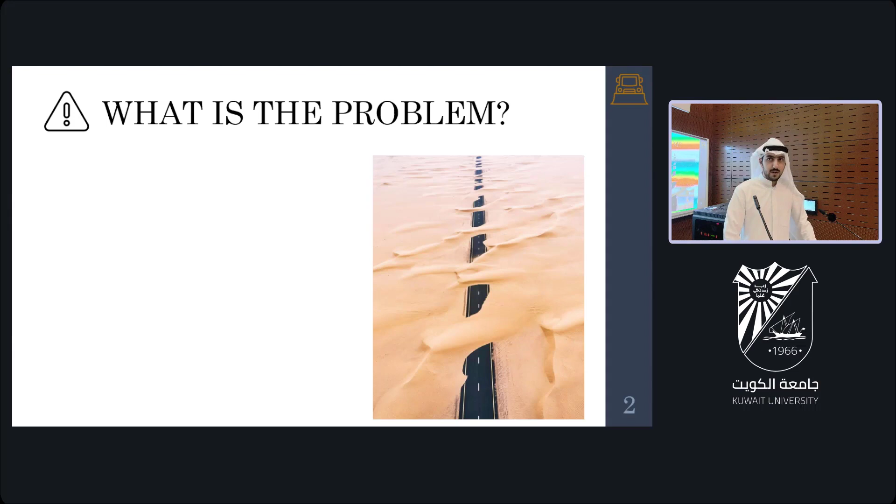As you know, Kuwait is located in a hard geographic location that causes a lot of troubles to us, and one of these troubles is the desert. The desert is a source of very fine sands that can be moved by the winds. When the sands move by the winds, they accumulate on roads, causing many problems like car accidents, logistic obstruction, and impeding the movement of residents in new cities.

Logistic obstructions mean we have international trucks that move goods from neighboring countries. Also, Kuwait cities are becoming larger. We have new cities like Sabah Al Ahmed City and Al Mutla' City, and all people living in these cities are suffering from sand accumulation on roads.

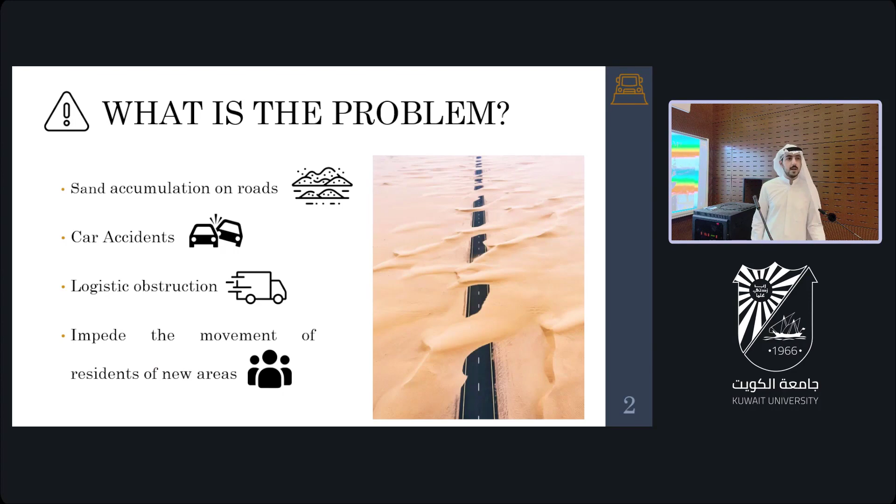The second road is Safq Road. This road is very important because it serves Sabah Al Ahmed City and its residents. The last road is the As-Sabbiya motorway, which will, inshallah, serve the future Mina Mubarak Al-Kabir port. This road problem needs to be solved.

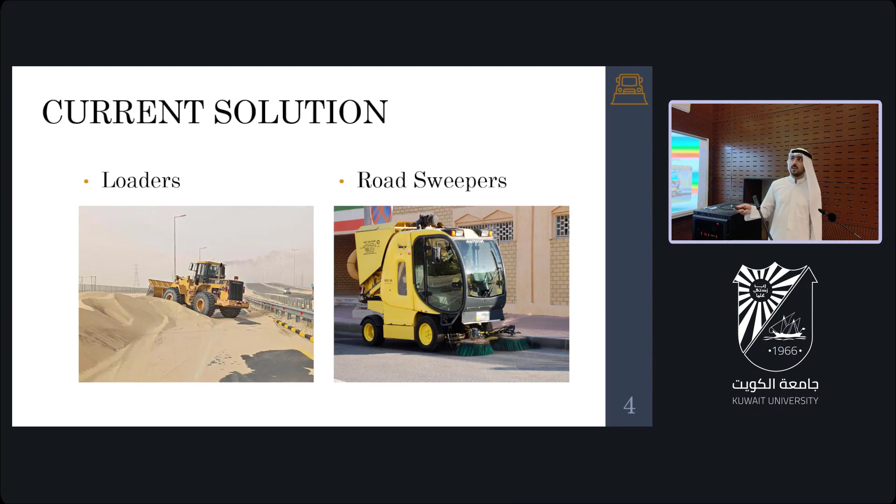The current solution is that the government has contractors that use loaders and road sweepers to remove the sands from the road.

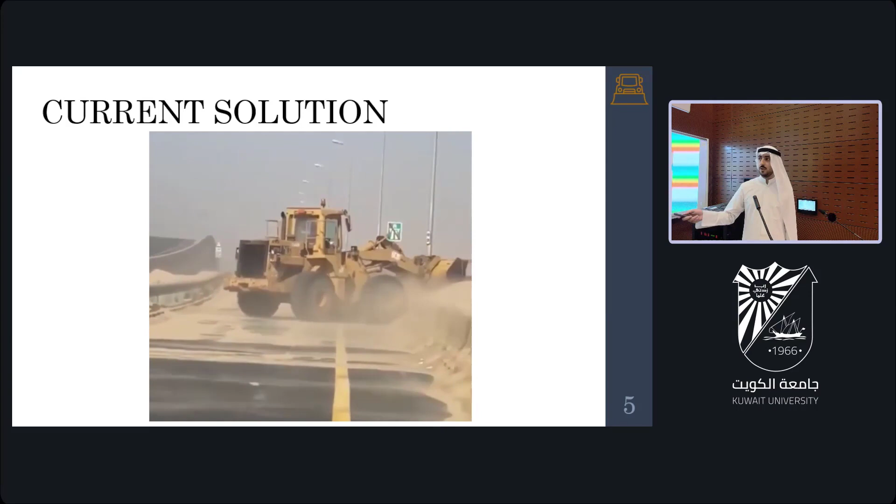As you can see in this video, at the very beginning, the loaders come and remove the mountains of sand and put it on the side of the road. Then the road sweepers come and remove the remaining 1 or 2 centimeters of sand, because the loaders are not capable of touching the asphalt, otherwise it will break it.

So there are many disadvantages of the current solution. It will double the effort - you need both loaders and road sweepers to do one operation. Also, you will double the need for laborers.

The second thing is that it is money and time consuming. You need more than 2 days to complete one road, and it also costs hundreds of thousands of dinars.

The last thing is that, as you know, Kuwait is full of unutilized potentials, and we can utilize these potentials more. We have Ministry of Public Works engineers - we consider them as manpower. Also, the Ministry of Public Works has many Pajero vehicles, thousands of them, so we can take benefit of them.

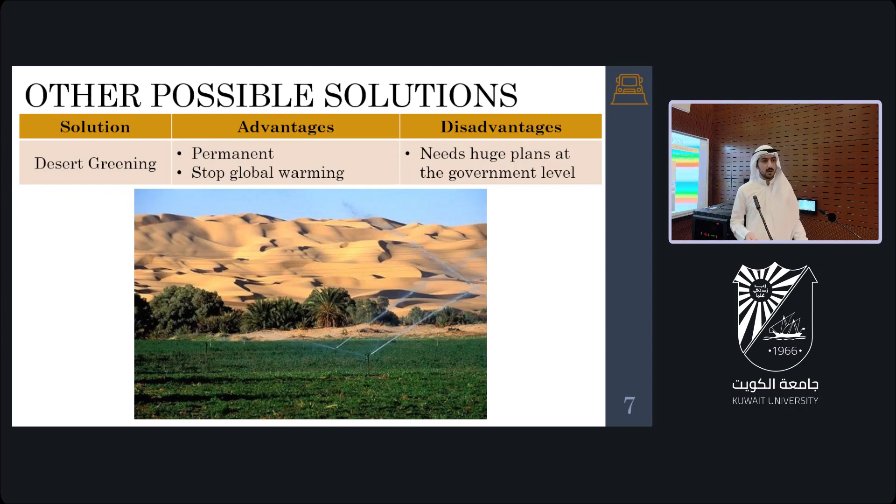There are many other possible solutions. The best solution is that we need to plant the desert - it is permanent and will stop global warming. However, it needs huge plans at the government level, and we are not capable of doing that as students.

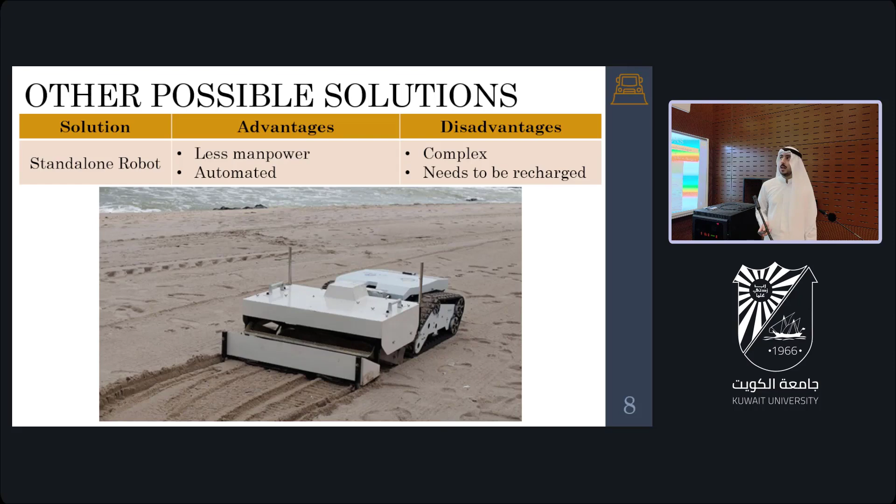The second solution is that we can design a robot which will reduce the manpower. It is fully automated. However, it is complex and needs to be recharged.

The last one: we can use the snowplow that exists in northern countries. It is time and money efficient, and it utilizes unused resources. However, it is not permanent - you have to keep doing the process continuously, unlike planting, which will solve the problem from its roots.

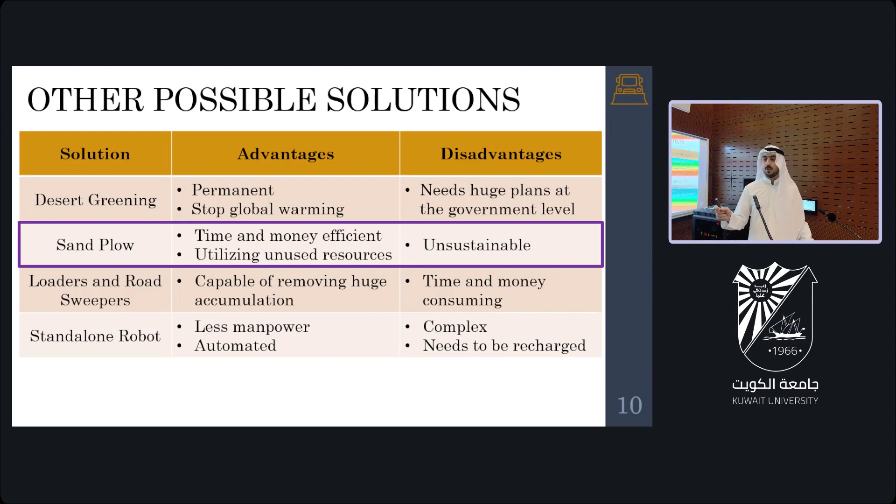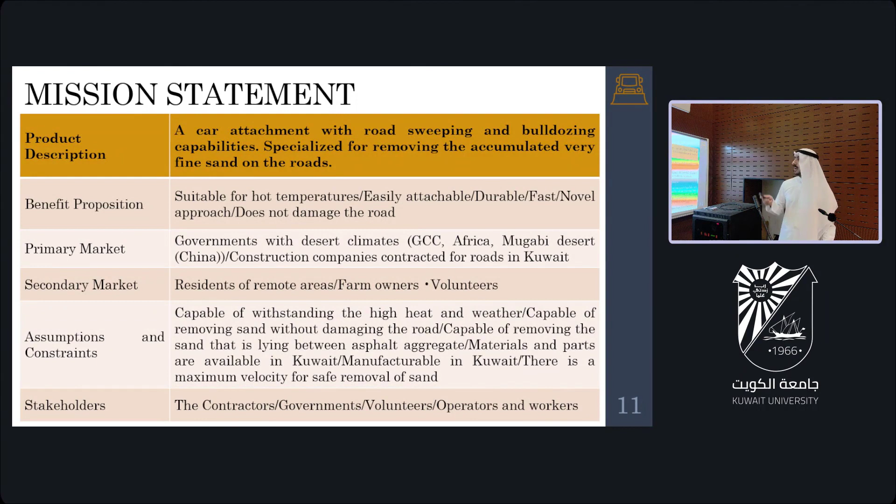So when comparing all possible solutions, we will choose the snowplow and modify it to be capable of pushing sand from the roads. This is our mission statement: we will design a car attachment with road sweeping and bulldozing capabilities, specialized for removing the accumulated very fine sand on the road. We generated many concepts for this sand plow, and my colleague Abdulaziz Fawzan will continue from here.

Before starting with the concept generation, we wanted to know exactly what our primary consumer, the Ministry of Public Works, wants. We had an interview with one of the engineers, who gave us customer statements. From there, we translated them into interpreted needs and used those needs to find metrics that specify these needs.

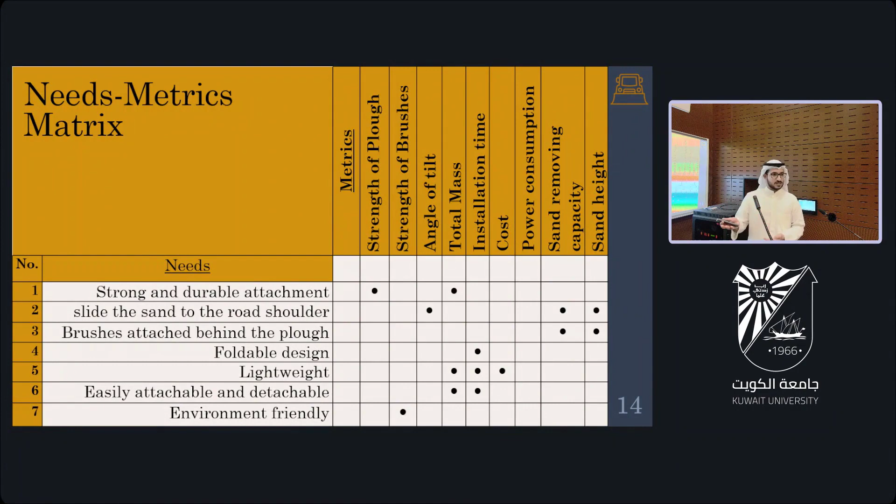After that, we made a needs-metrics matrix to further understand their requirements. From there, we categorized each of the functionalities of the project and divided them accordingly—for instance, their sand-removing mechanism using a plow or brushes, and a trip mechanism that tries to avoid obstacles or obstructions in the road.

Now we started with the concept generation. We wanted to look at several chunks and functionalities, such as the attachment method. We looked at front receiver hitches and hook attachments.

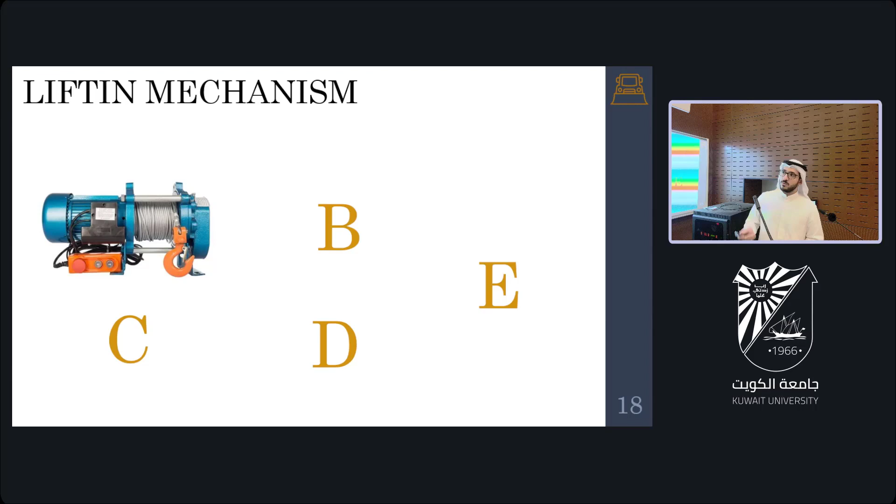From there, we looked at the lifting mechanism, which gave us 5 options: the electric winch, manual winch, power screw, hydraulic, and finally manually lifting the mechanism.

For the thin layer removal, we only had two options: brushes, which you can see everywhere in street sweepers, or blowers.

After that, we wanted to know how to use these brushes or blowers using motors, such as the DC motor or AC motor. And for the brush lifting mechanism, similar to the lifting mechanism of the plow, we looked at...

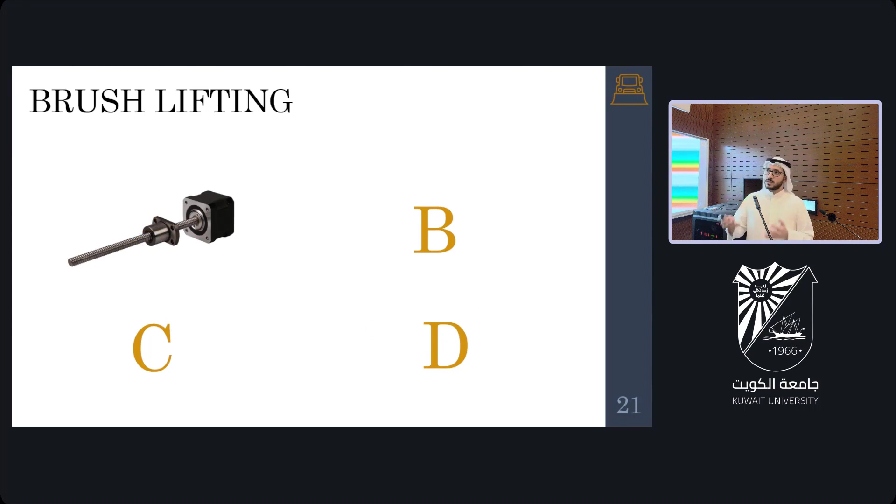electric power screws, normal manual power screws, attaching the brushes to the main lifting mechanism, and finally manually removing and attaching them. The final chunk was the trip mechanism.

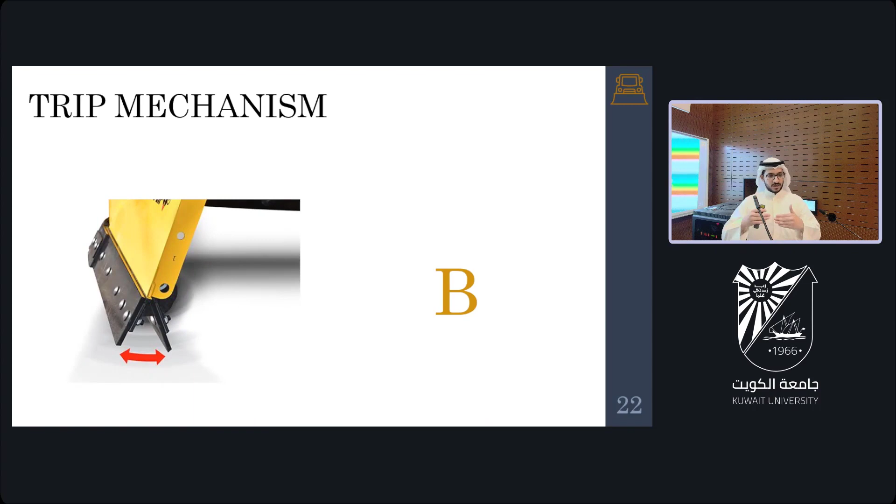We only had 2 options: the trip that only trips the bottom of the plow, as you can see here, or the whole plow.

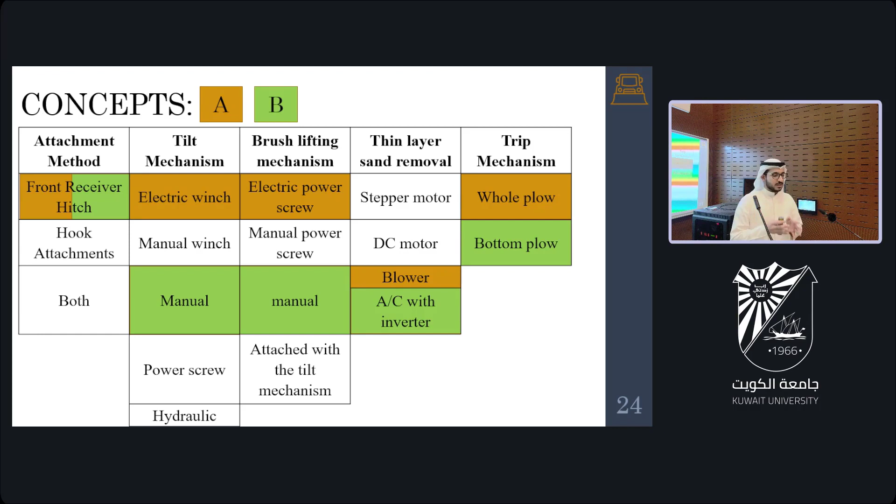After we found and looked at several options, we generated the first concept, which looks for the automation of the product. The second would be to try and make it as manual as possible. The third would be to make it as strong and durable as possible for high forces.

The fourth would try to minimize cost, and finally the fifth would be for simple manufacturing.

Now for the concept selection, the process we went through was: after we generated the concepts, they go through a screening, and from that screening we wanted to filter them out.

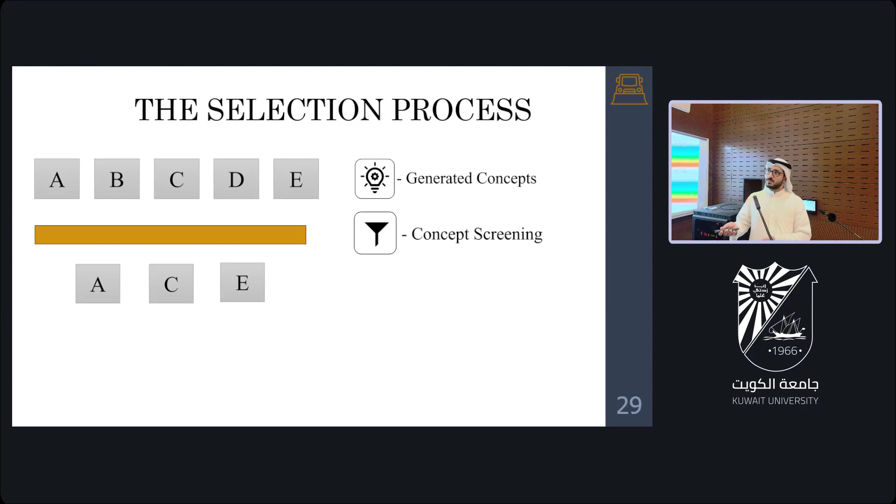After the concepts were filtered, they went through another screening called concept scoring, which is a bit more in-depth and decisive. It uses weighted scoring to better find the best concept. From there, we would find the final concept.

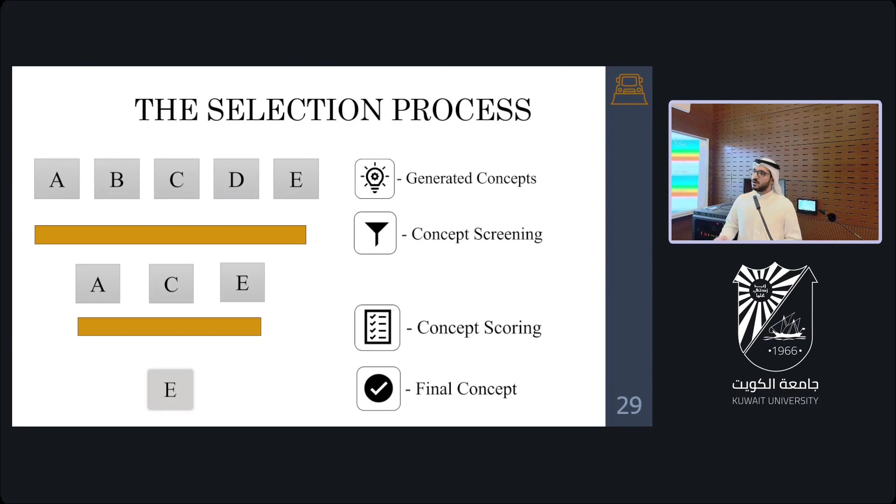Now for the concept screening, we take the selection criteria from the interview mentioned before and compare each of the concepts with a reference. Our reference was the snowplow, since it's the closest one to our product.

From there, we look at the net scores and rank them, and determine whether or not we want to continue. Now we finished with the screening and decided whether or not to continue.

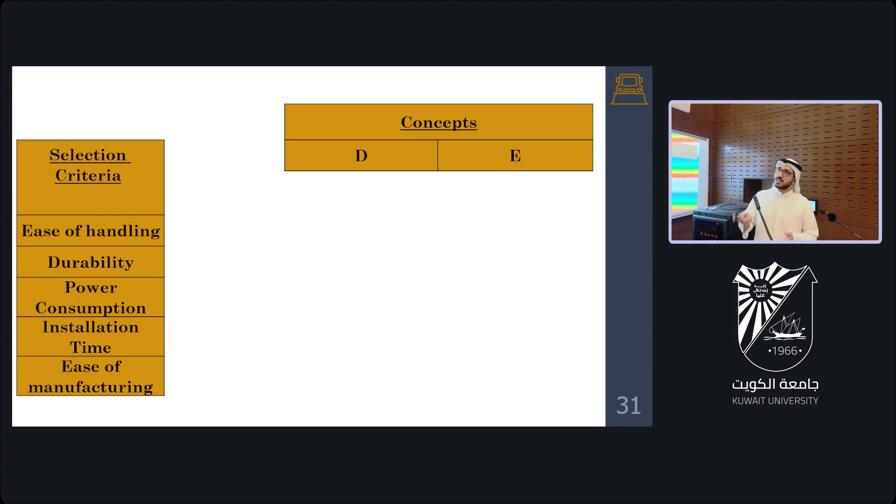We went to the concept scoring, which similarly looks at the selection criteria and compares concepts. However, the difference was the weighted scoring. From there, we look at the weighted scores and, similarly to the screening, look at the total scores and decide whether or not to develop or discard the concept.

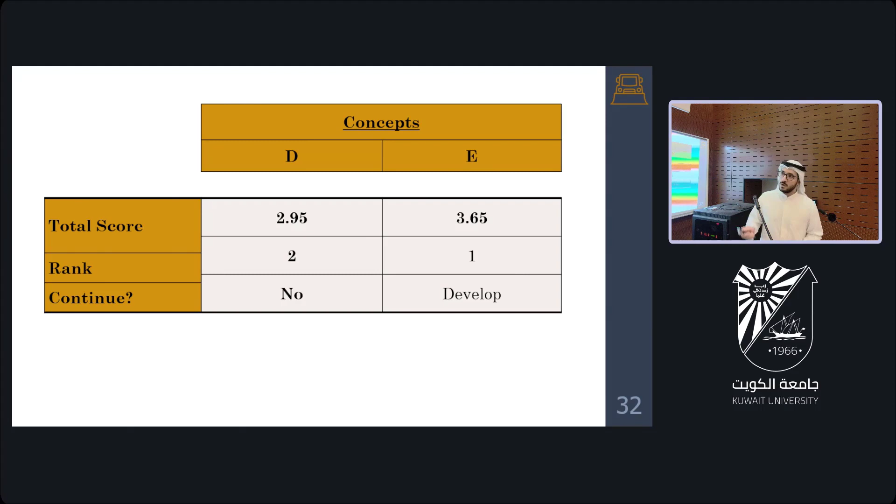We decided to go with the final concept, concept E, which favors simple manufacturing, since manufacturing was a key point and very important to us, as not a lot of workshops would want to work with heavy-duty prototypes.

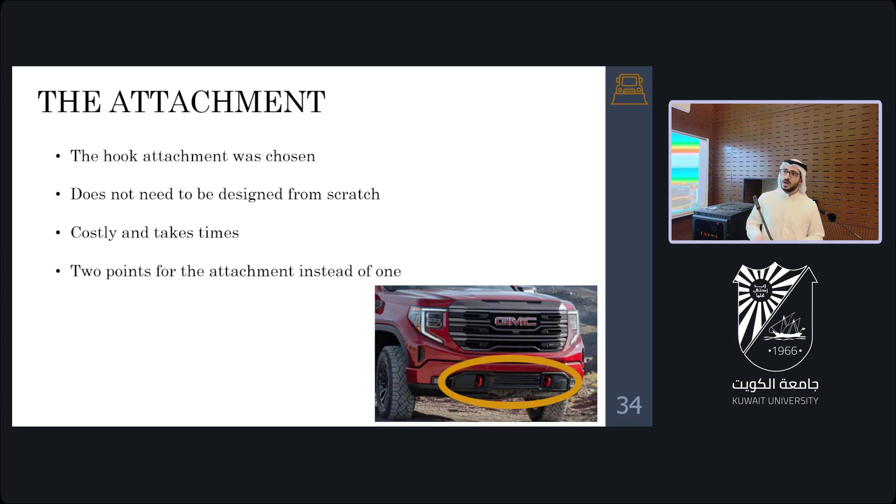For the attachment, we chose to go with the hook attachment, since designing a new front hitch would be time-consuming and costly. Similarly, we chose 2 points for the attachment instead of 1, making it more durable.

For the lifting mechanism, we decided to go with the manual winch because it's simple and effective, and the brushes mentioned before just attach to the main lifting mechanism.

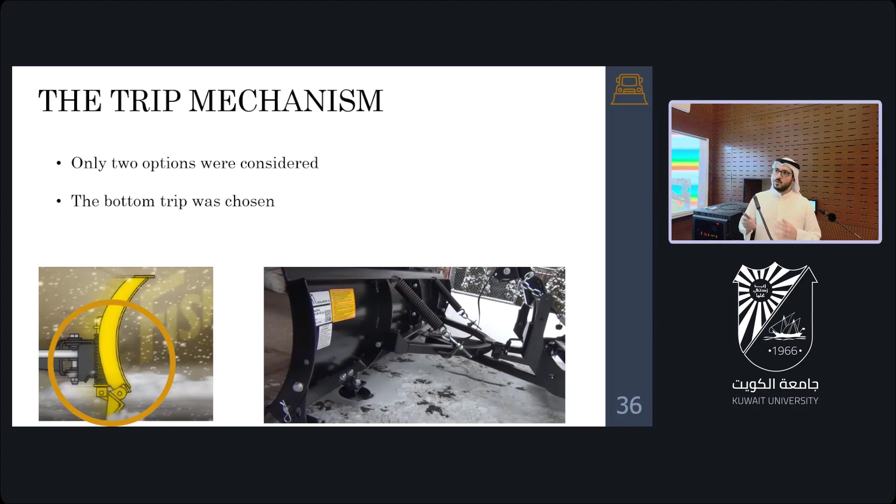Finally, for the trip mechanism, we only had two options, and we decided to go with the bottom trip. This was chosen mainly due to manufacturing issues and because using the whole plow would further decrease the strength of the plow.

And for the final chunk, the thin layer removal, we chose the AC motor with an inverter, solely due to the fact that DC motors are not readily available in the market. The ideal case would be a DC motor, because using a DC motor would mean fewer components, since a power inverter is needed for an AC motor.

So after we designed our product at the system level, the next step was to design it with more detail, like getting parameters such as dimensions, stresses, and factors of safety. Before we start the analysis, we had to determine the forces exerted on the system.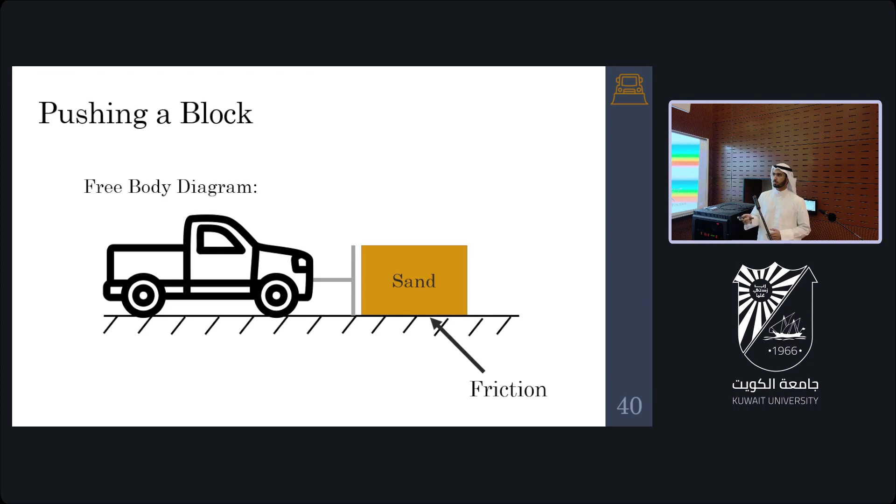Our system is simply a car, a snowplow, and a block of sand. There is friction between the road and the block of sand. As the car moves forward, the sand exerts a friction force toward the plow, and there is a reaction between the car and the plow. The friction force is given by this equation.

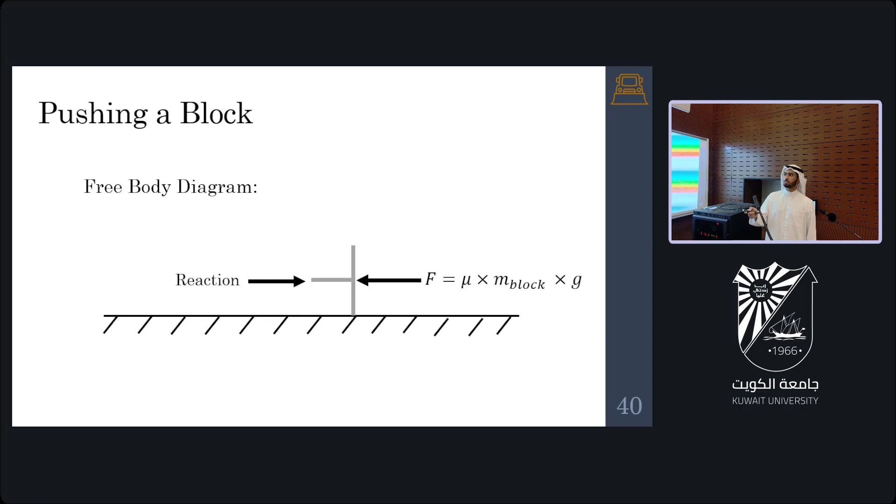After we determined the forces, we were ready to start the stress analysis. So we started with an arbitrary design. The aim of this design was to ensure the feasibility of the project and to determine the points of maximum stress. Two loads were applied.

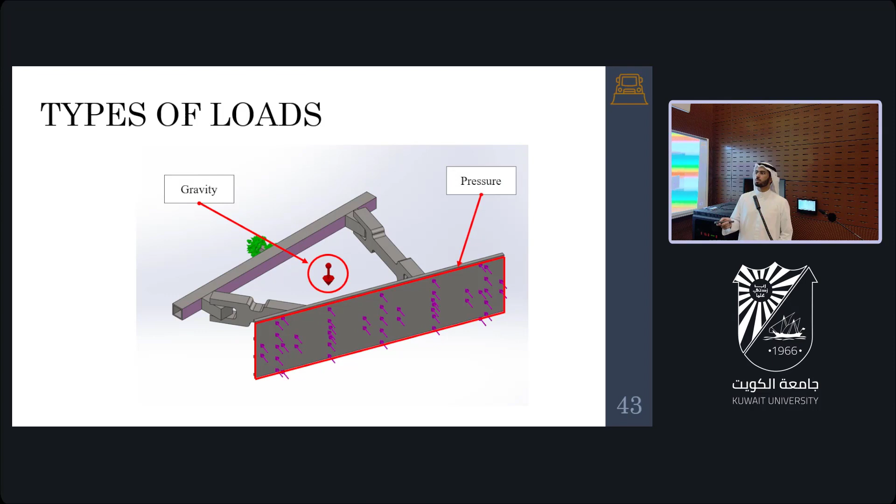The first was the gravity load, the weight of the system. The second was the pressure from pushing the sand. The maximum stress locations were the hinges in the front and the mounting hitch. So this design was very over-designed - it is strong enough to sustain a load of approximately 2 small cars.

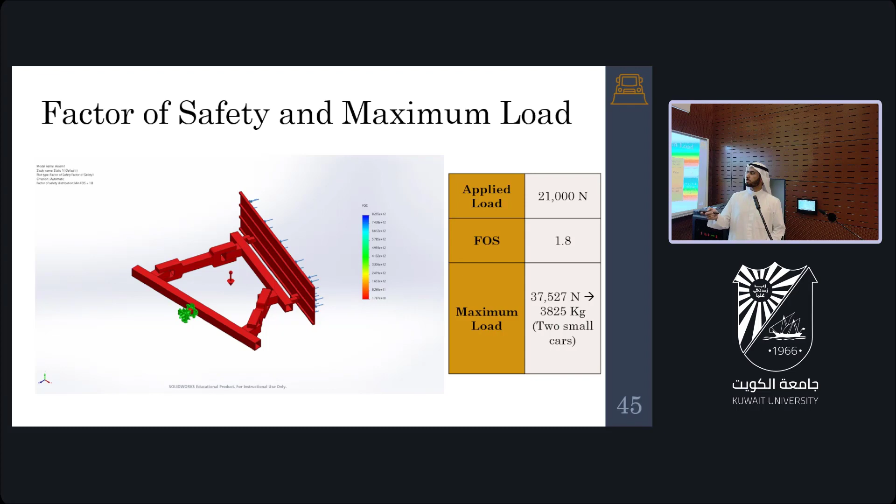So we had to improve it further to optimize it. We used standard sizes, smaller sizes as well. We added the cylindrical rod to help the plow rotate up and down, and the plow hinges were removed since we didn't need them, and they were stress concentration points.

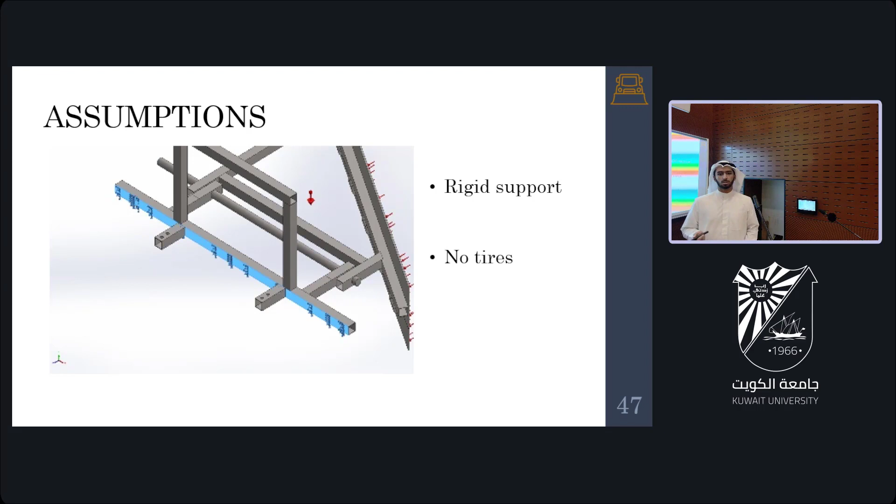The assumptions for this analysis are that the support is rigid, because we only wanted to study the frame and design the support later. No tires support the frame, because this is the worst case scenario, and it's always better to design for the worst case. The third assumption is that the material used is AISI 1020.

So we applied the loads mentioned previously, and the maximum stress locations were these points here. The steel size we used is 5 millimeter thickness. We got a factor of safety of 1.9, and the mass of the system is 110 kilograms. The factor of safety was good for us, but the mass was very heavy.

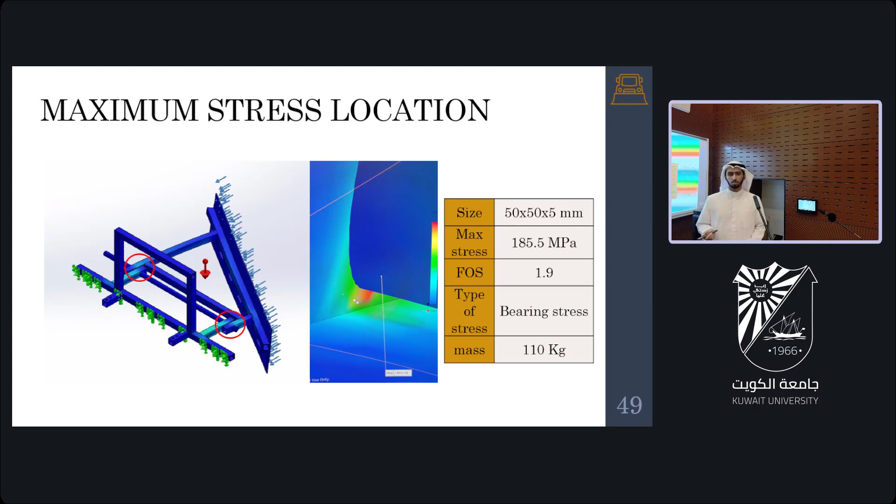We wanted to reduce the weight even further, so we added a third bar to allow us to reduce the thickness, because this is the place where maximum stress occurs. After adding this bar, we managed to reduce the thickness to 3 millimeters. The factor of safety increased to 3.8, and the mass decreased to 73 kilograms, which is a very good improvement with respect to the previous design.

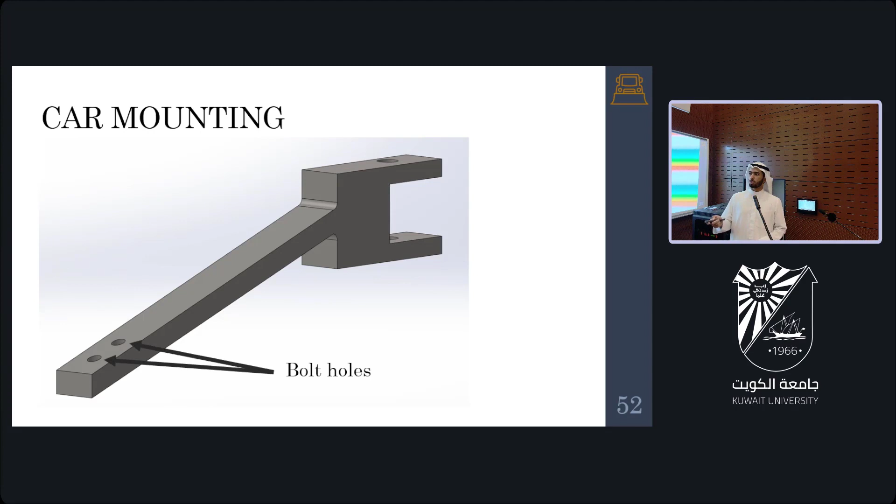Regarding the car mounting, we designed this piece. It is attached to the car by 2 bolts, tied to the car chassis, and the frame will be held by this hollow square shape. A pin is attached here to fix the motion of this frame, because without the pin it could go right or left. So this pin will help it stay in place.

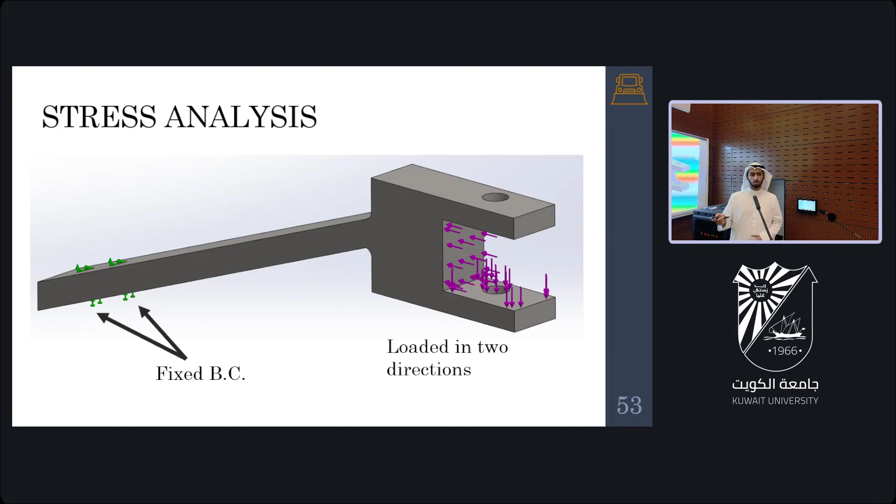For the stress analysis, we had fixed boundary conditions at the bolt's place, and we had load in 2 directions: the first being the downward load for the weight of the system, and the second being the horizontal load for the pressure of the sand. This piece is the most critical part of our product - if it fails, the whole system fails.

So we intentionally over-designed it because we don't want it to fail. And if we increase its mass, it wouldn't be a problem because this is a very small piece compared to the rest of the frame. The realized factor of safety was 9.2.

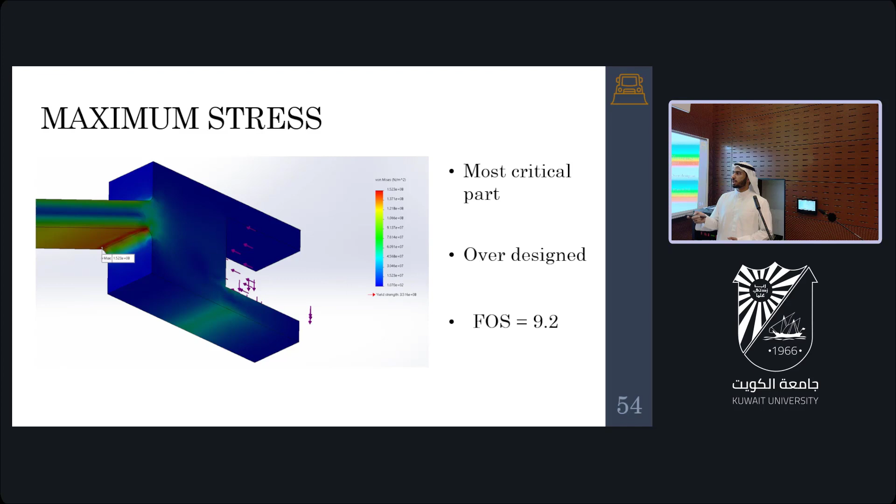Thank you. Now, for the manufacturing, we wanted to look visually at how the product would look. So we tried to draw it in AutoCAD and look at exactly how we wanted the manufacturable design to be. And this is another view, an exploded view of the design.

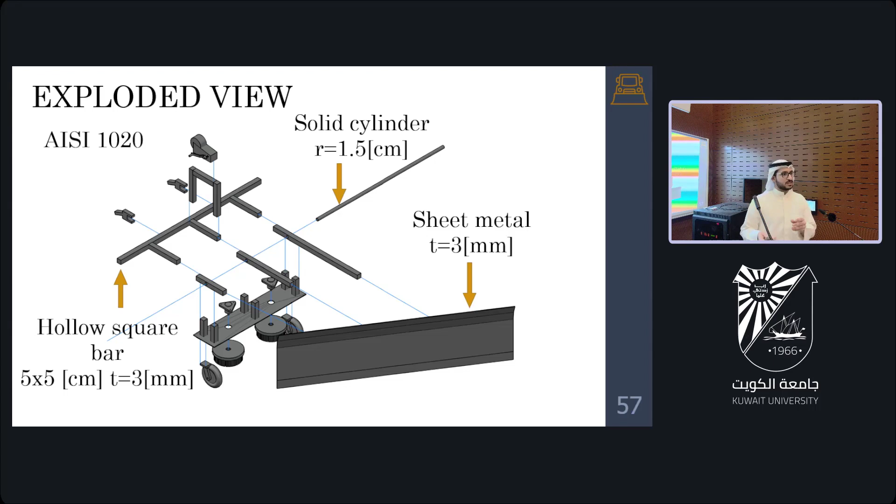Now for each of the components, we used AISI 1020 steel, hollow square bars, a solid cylinder with a radius of 1.5 centimeters, and finally sheet metal with a thickness of 3 millimeters. For the manufacturing process, we wanted to first look at the design we had and split the process into 4 sub-assemblies.

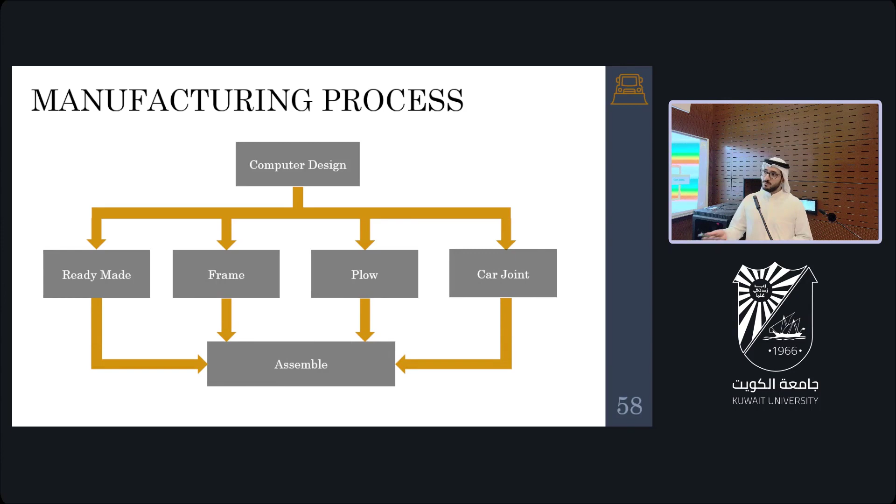We had the ready-made items, the frame, the plow, and finally the car joint. After we assemble all of these 4 components, we finally assemble the completed prototype. Now, I'll be explaining each of the sub-assemblies and showing the completed designs.

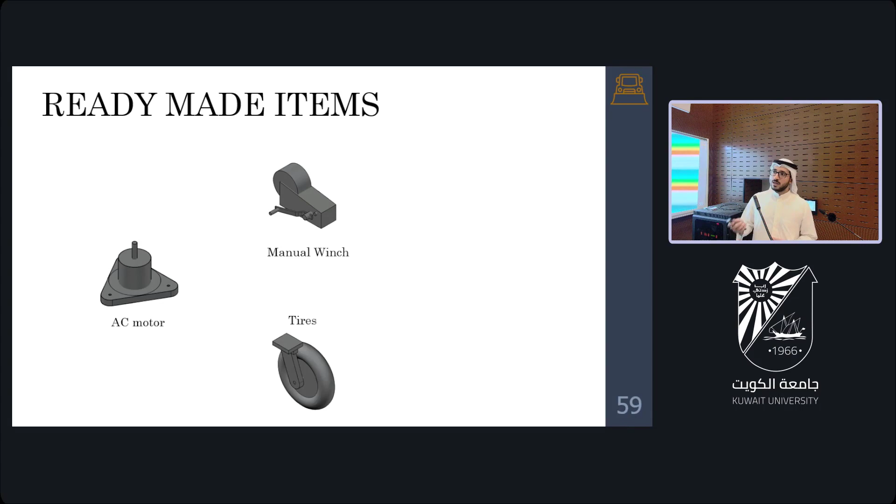For the ready-made items, we only had 4 items found in stores: the manual winch, the AC motor, the tire, and the street brush. For the manual winch, we obtained them in Jawad al-Saffar. For the motors, Al-Qamar. For the tires, Jawad al-Saffar as well. And the street brushes were found in Ma'rafi Cleaning.

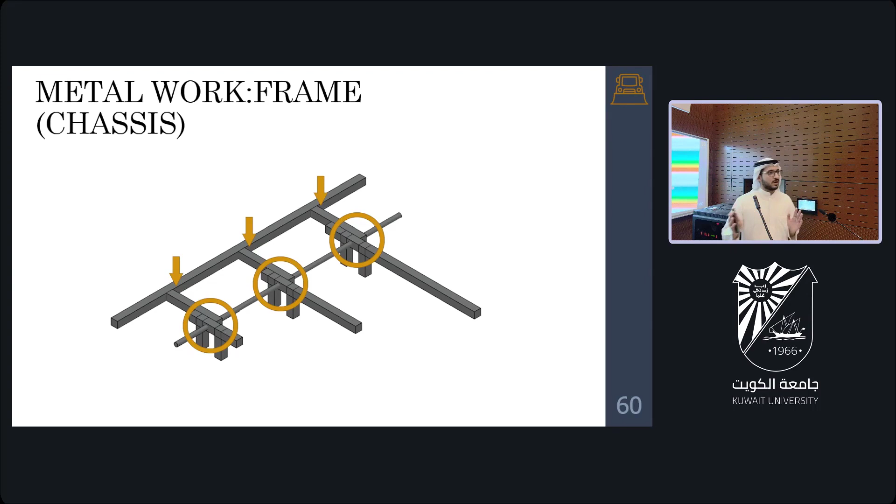For the frame, or specifically the chassis, we wanted this design. For manufacturing, there's only 2 basic components that we looked at: welding and drilling. We only needed to weld the beams and drill holes to allow the cylinder to pass. And the final sub-assembly looked like this.

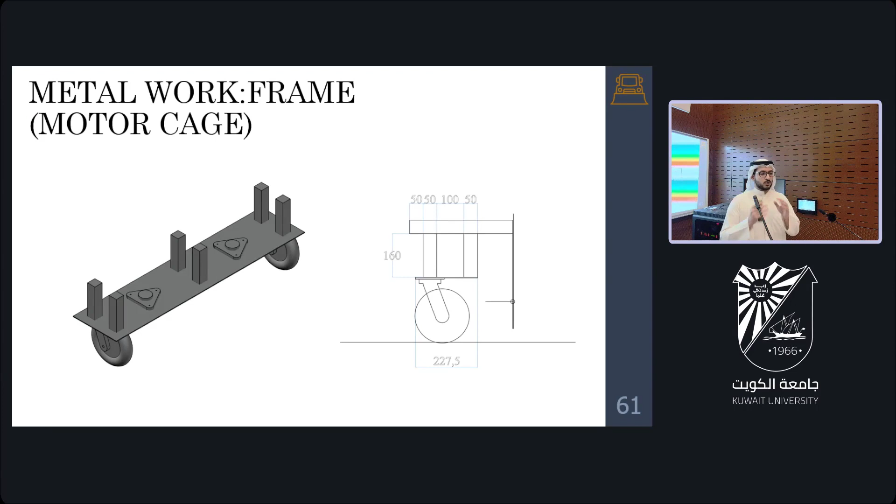For the motor cage, we had an issue with the brushes. They were too short and wouldn't reach the ground. So what we did was try to lower the mounting position to make it closer to the ground. And what we were left with is the final sub-assembly being as follows.

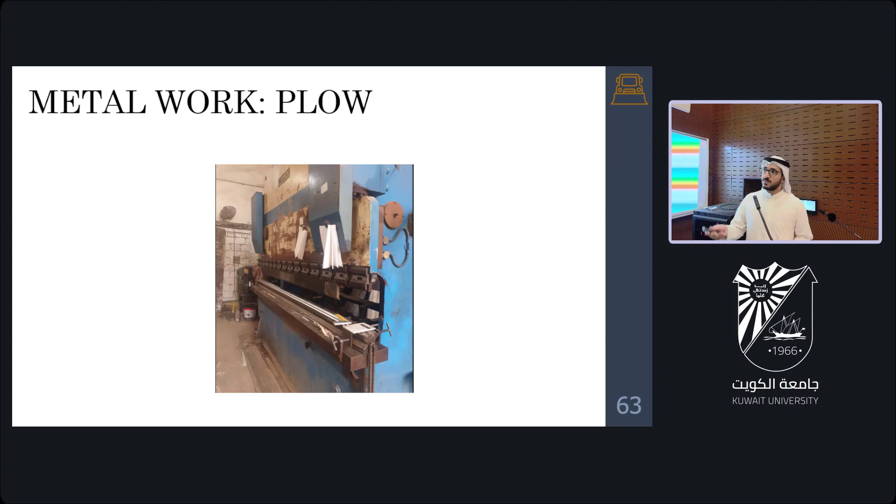For the plow, it's simply just a sheet metal that's been bent, and a bending machine was used, and the final sub-assembly was as follows.

Now, for the car joint, we had an issue. What we wanted was a thickness of 5 centimeters. And the problem was the standard dimensions did not provide 5 centimeters. So we had this issue of not being able to manufacture this sub-assembly.

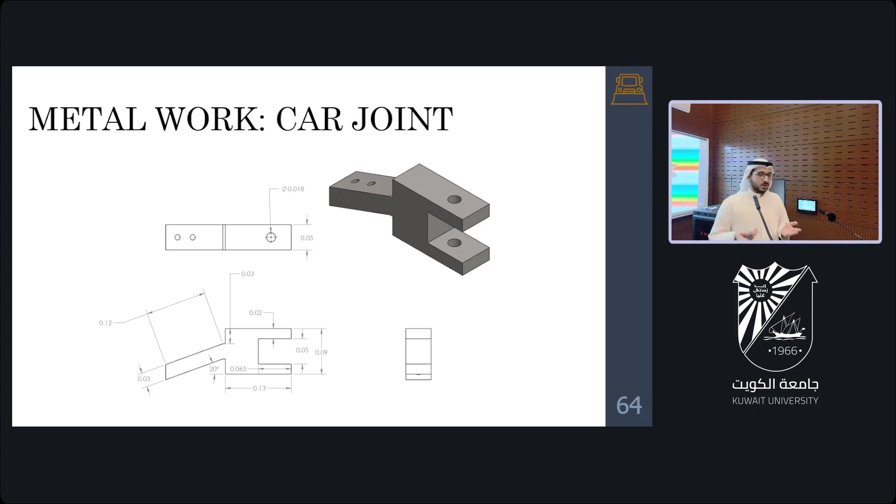However, as my colleague just mentioned, the car joint was over-designed. So what we did was, instead of using 5 centimeters, we used 2 centimeter thick components and just welded them together and used that instead of 5 centimeters. And the final sub-assembly looked like this.

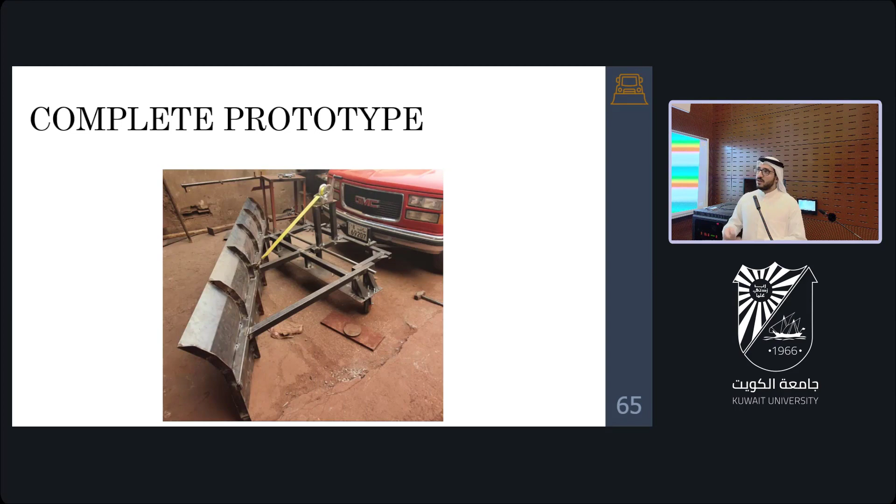Now, after we finished manufacturing comes the feasibility. And this is what my colleague is going to discuss. Thank you.

During the design process, we gathered information, and after we finished the prototype, we did a feasibility study to evaluate the project's potential for success. So we studied 3 areas of project feasibility: the technical, the economical, and the operational feasibility.

Under each area, there were some questions we had to answer, like: do we have the project requirements? Will the project make profit? Is the project actually reliable?

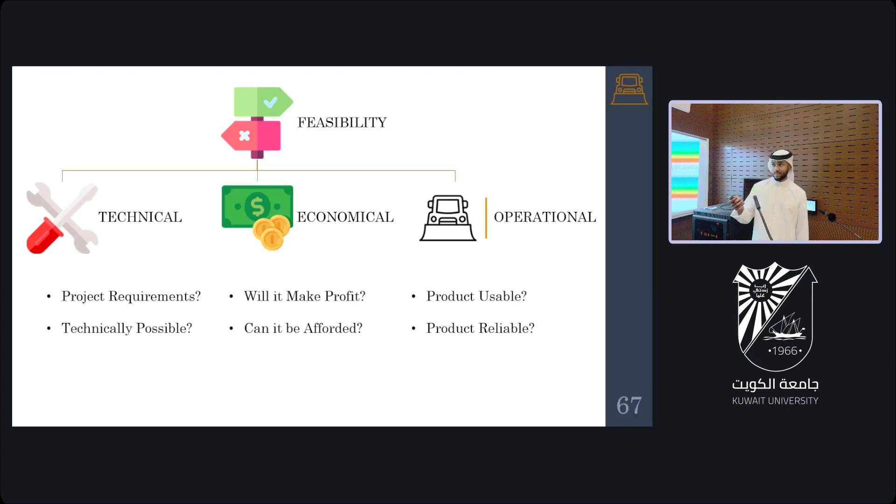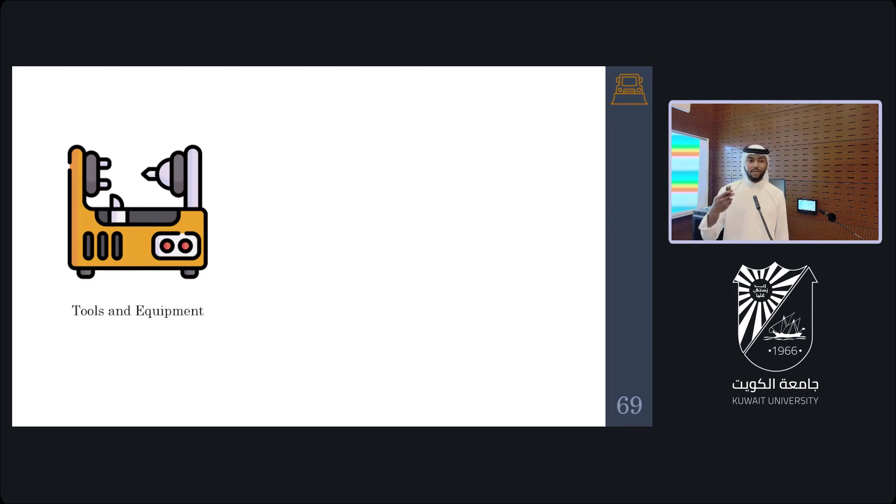Starting with the technical feasibility: what makes the project technically possible? We need the tools and equipment required to manufacture each unit, we need the skilled labor that knows how to use these tools, and we need the components of each unit.

As my friend Abdulaziz illustrated, we do have the tools and equipment in Kuwait with enough capacity for mass production, and we have the skilled labor with the blueprint on how to assemble each unit. But when it comes to components, yes, we did buy them from local stores in Kuwait, but for mass production, we had to search for suppliers, which we did. Simply by that, the project is technically possible.

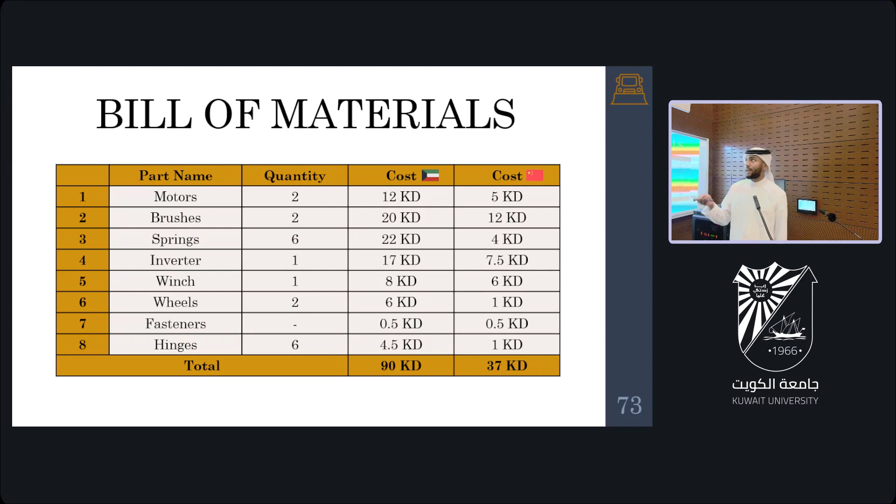For the economic feasibility, the question is: is the project profitable or affordable? These are the total costs of the project, starting with the materials. These are the total costs of the actual prototype. And these are, if we want the exact same components with the exact same specifications from Chinese suppliers - you can see the difference.

The manufacturing costed a total of 490 KD. So the total costs per unit are 580 KD. We decided that we're going to sell each sand sweeper for 775 KD. Before you judge us, keep in mind that loaders cost the country 2,400 KD per day.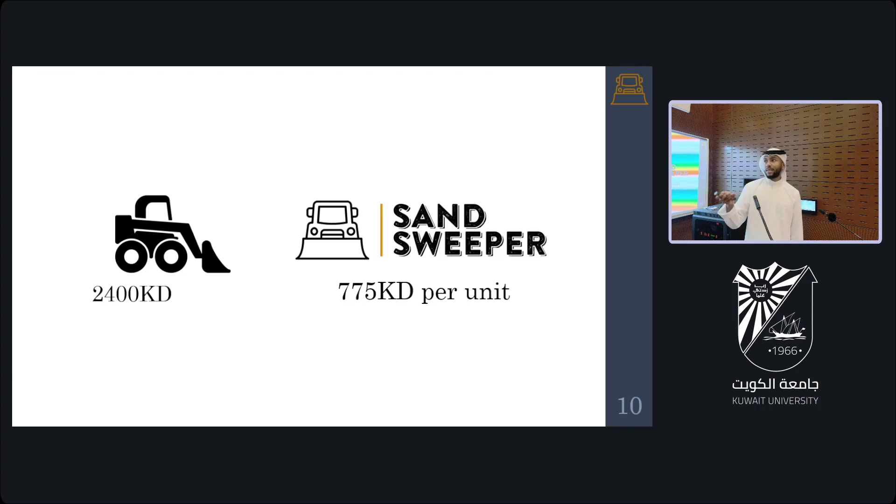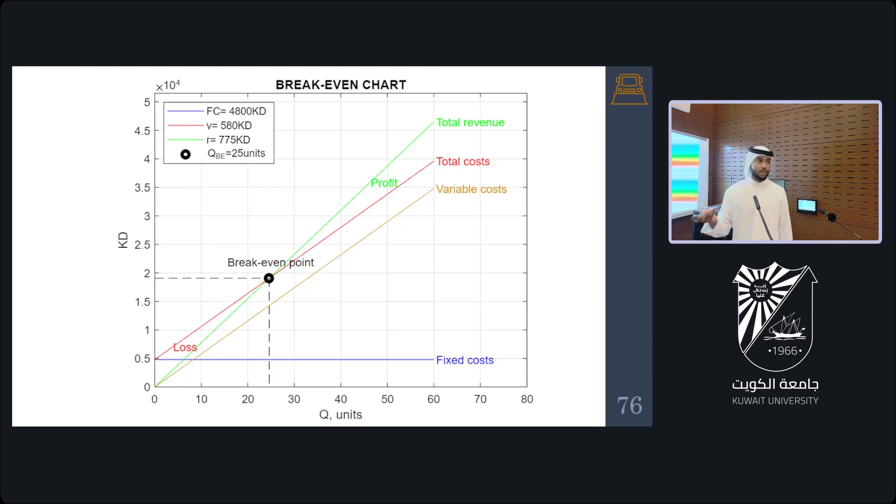So we did the break-even analysis, and as you can see here, we're going to make profit out of this project if we sell 25 units, 25 sand sweepers. And this number 25 takes us to the next point of the potential market.

On the other hand, we have the GCC region, where, as we mentioned earlier in the introduction, the governments actually do care about this problem, and they spend hundreds of thousands every year on solving it. Also on the individual level, people have high incomes, so they can afford an 800 KD product. So the GCC is our potential market.

Finally, for the operational feasibility, when we try to sell a product, how do we convince people? We show them: is the product actually reliable? Is it usable? Can the sand sweeper actually sand sweep?

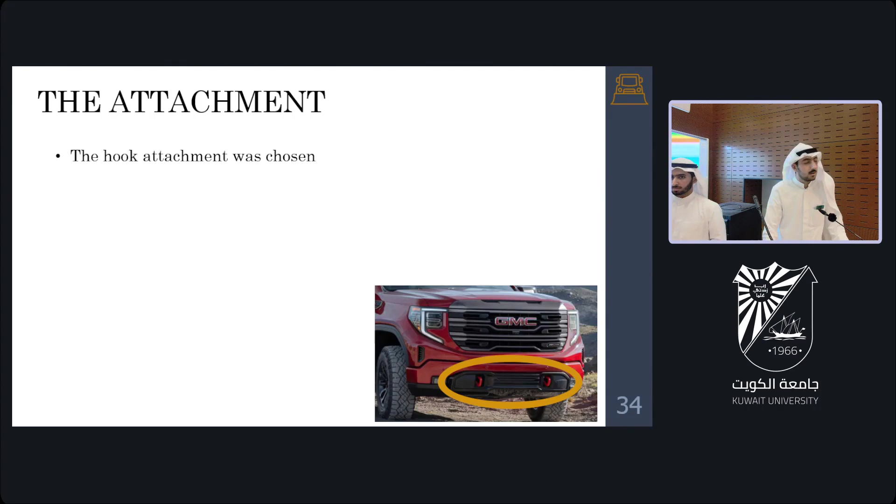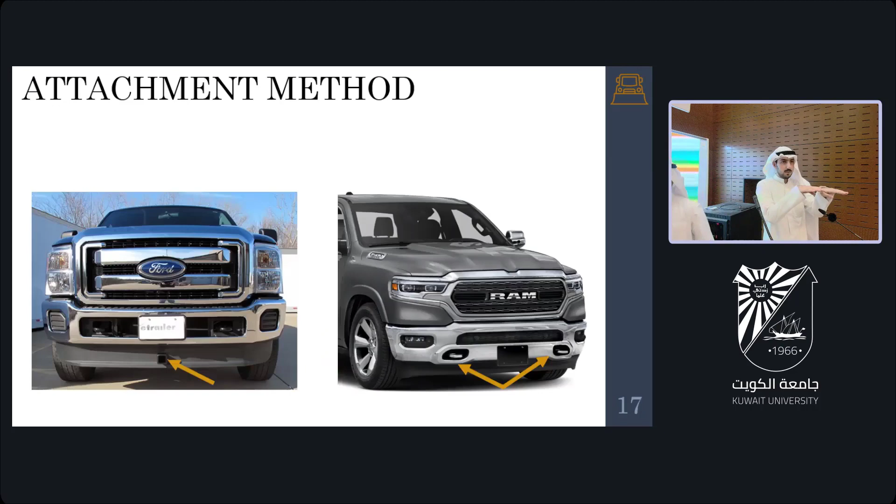Okay, so what I see, I'm sorry. Yes, your angle is going one way. Could be the other side. No, we are planning to bring two cars like this. The car on the left will throw the sand to the car on the right, it usually happens like this.

Which means at the time you're going to remove the sand, no other cars are moving. You're going to block the road, right? Yes, the road will always be blocked. Even with the loaders.

No, because I mean, when there's snow in, let's say, European countries, you see it's moving while still using the road, nothing is going to obstacle you. Yes, it is moving, but the cars, like beneath it, you see?

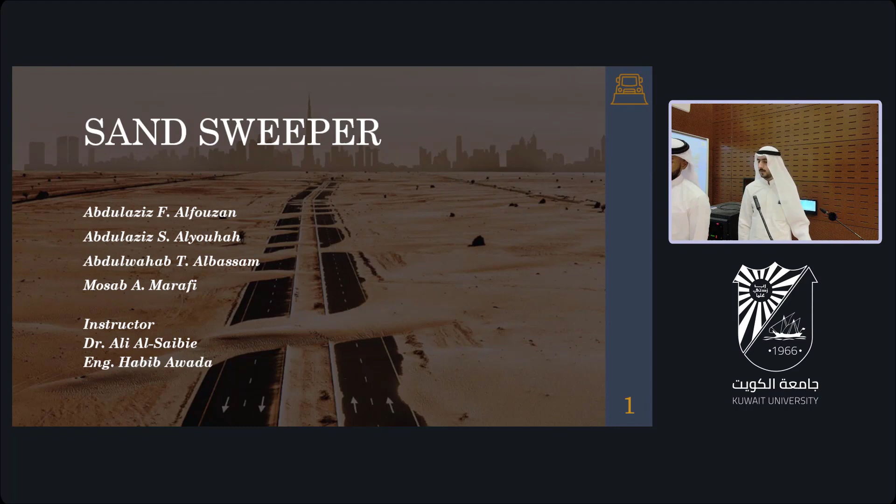They are using multiple plows at the same time.

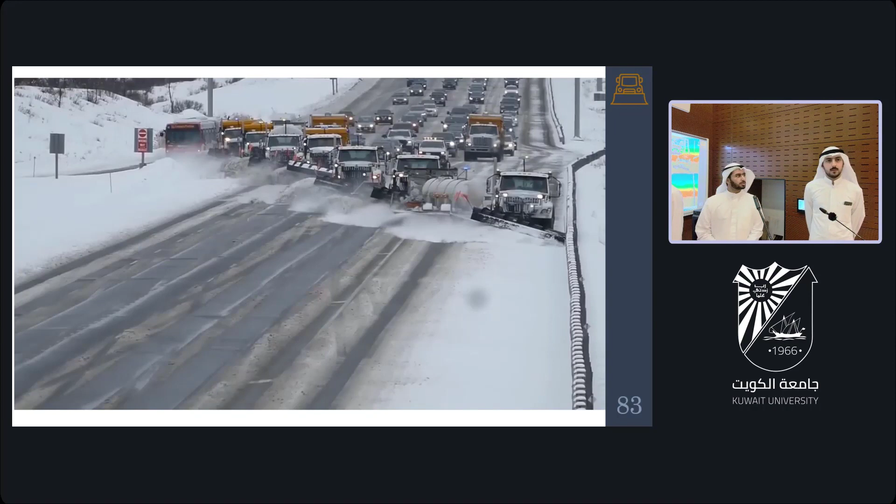Okay, thank you. Other questions? The audience, we have a question online. Dr. Alia, you want to ask your question? I was trying to write.

First of all, I see a very well organized presentation for the students. They work in great harmony, and the transition from one person to the other was so smooth and nice. So just a quick question: did you operate your sand sweeper for a long period of time, or just a few minutes as we saw in the video? And what, as Dr. Majid asked, what was the height of the plant, what was the maximum height that you can cover?

Regarding the maximum height, it is 0.5 meter. Regarding the first question, yes, maybe I didn't understand the question. How long did you run it for? The same duration as in the video.

So in the operation, you might need to operate it for hours. So don't you think your system might fail at a certain point? You only ran it for 1 or 2 minutes. No, I don't think so. We did our analysis and we are very confident with it.

Thank you. All right, we have Dr. Fatma Mado also has a question. Please go ahead.